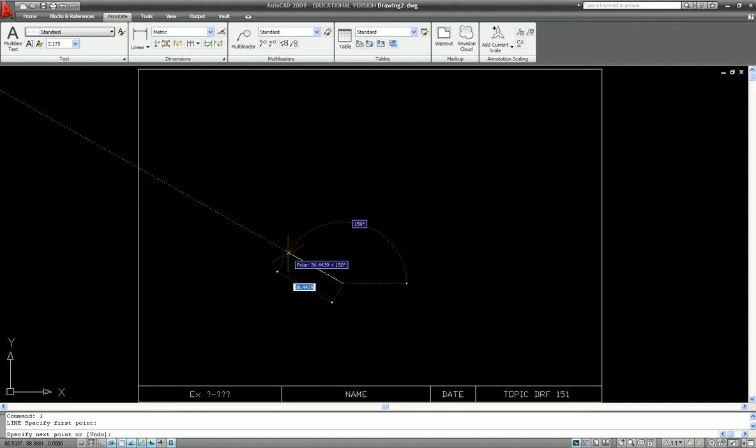Coming out along my 30 degrees, I go 60. I can then go up 30, back in 15, down 15, and now that's going to come all the way back out here to the edge. That is what represents the frontmost plane for this particular object.

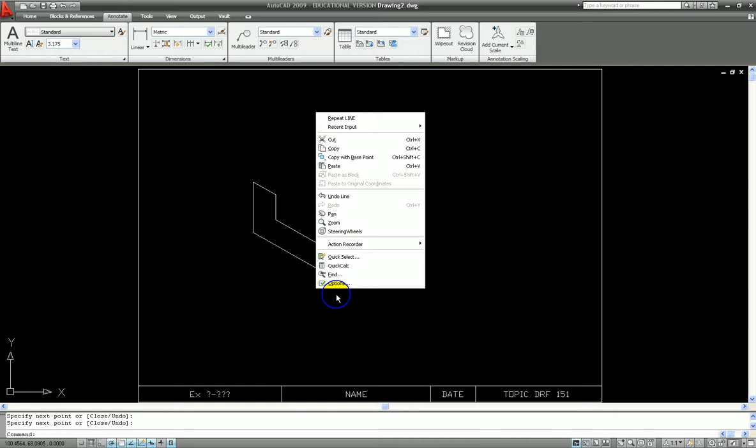Now I'm going to go ahead and repeat my line command, and I'm going to do the rightmost plane. So this goes over 30, up 25, and this is going to come back in 10, down 10, and that's going to close off. Now I can begin working on the rest of this piece.

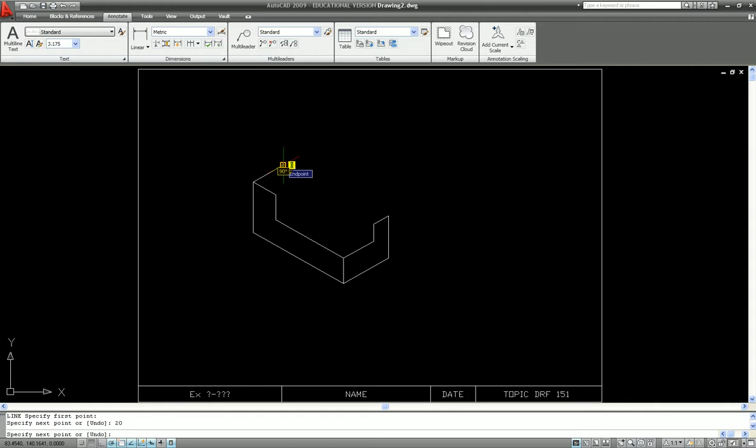And the way that I'm going to do that is I'm going to draw this top edge back, and this top edge goes back 20. After it goes back 20, it goes up 10, and then it goes back over 10. So now what I'm working on is that back profile. This comes over 40, down until it meets the projection of this at 30 degrees, and then this closes off.

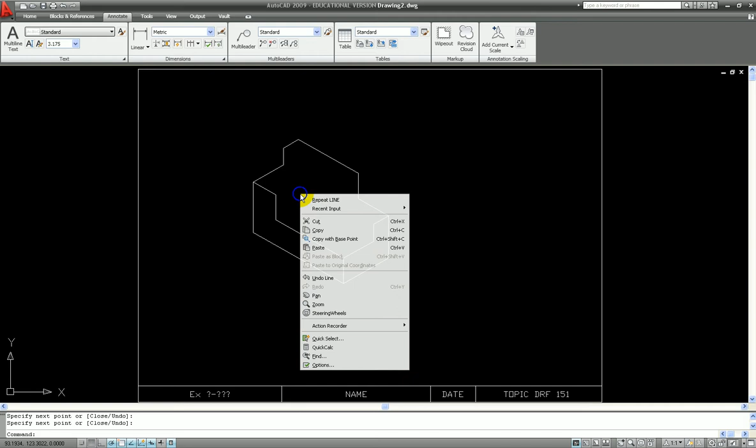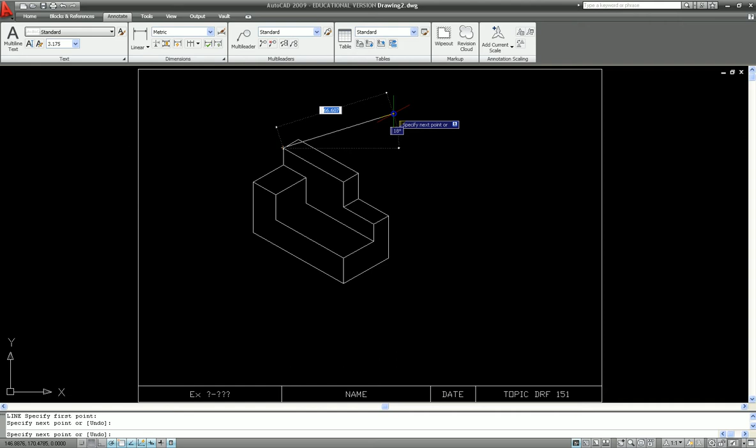Go back to my line command. We're going to make this edge solid. And what you can see starting to happen is you can see this thing starting to take some shape. So now we'll go back to my line, bring this to here, and then forward. This one here is going to come out to this point and then close that off. This will come up to here and close that off. And then we have another line segment that goes back to here to create that last segment.

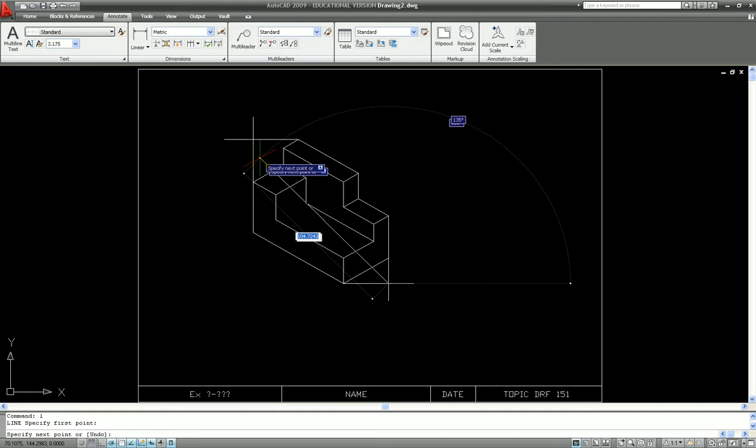Once again, we're just drawing the things that we see, and in this particular case, as far as the isometrics are concerned for this week, everything that you're going to be doing when you're done, it should look identical to the picture in the book. So now I'm going to go ahead and center this piece. And again, I'm just using the diagonal line method. It's the same method we've used since the beginning of the class. So now this thing is nice and centered.

I can delete all of this, and I need one more line that forms this edge right here. And the reason I could tell I needed one more line is because looking at the book, I saw that I didn't have all the lines that I needed. So now we're ready to begin dimensioning this, and again, it's just aligned dimensions. So first let me go to my dimension layer.

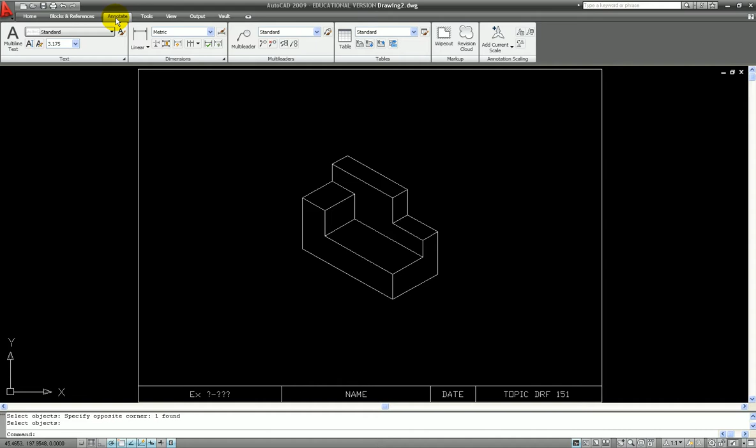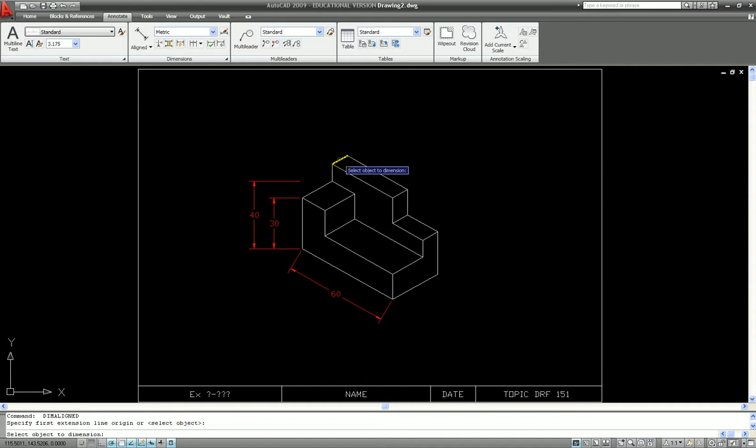And the icon for aligned dimensions is this one right here. So we're going to want to do this 60, this 30. For the 40, what you're going to notice is I'm going to project out to here to get that 40. And I'll show you why in a few minutes when we begin to oblique these.

Bring up that 40. Here I have a 15, and notice again I'm projecting to get that 15. There's my 25. There's my 30. That's all the dimensions that are required for this particular piece.

Now, when I go to dimension oblique, I'm going to do this in a slightly different manner than I did the previous one, because I know some of these dimensions are going to fall on the same obliquing angle. The 15, 25, 40, and 30 are all going to be on this angle here. The 60 and the 40 are both going to be on this obliquing angle, and the 10 and the 30 are going to be on this obliquing angle.

So rather than do it one dimension at a time, I went ahead and did multiple dimensions at the same time. Now, the reason I did this 40 like this and left a gap and the 15 with the gap, had I brought this all the way to that edge, what I would get is something really weird and obscure. So the reason we use the projection, even though we end up with this really big gap right here, we get the appropriate dimension. Then we can just go ahead and draw a line, making sure to leave a slight gap where that line is supposed to project to.

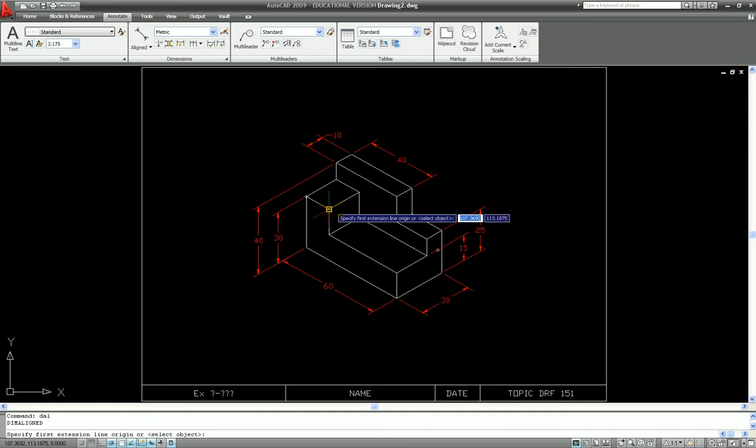Now, one thing that you do have the option to do, there are a few dimensions missing on the assignment, which we previously discussed. This is 15 right here, and this is 15 right here. So if I were to dimension those, I would go from here and then project this back to get my 15. Set that up to be oblique, and it's going to be on the same angle as the other two. And I'm going to move that just so that it looks a little bit better.

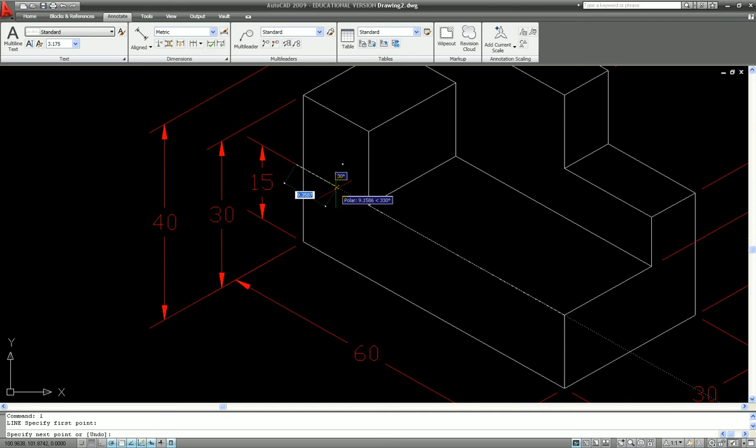Now, the way that's obliqued, it can't line up with this, so maybe I want to oblique this in a different direction. So instead of this way, we'll go back this way with it. Now, that kind of messed up the whole thing, so maybe in this case it's best to undo before you oblique. So here we'll oblique this one back at this angle. Okay, now we have a 15 that we can work with. I'll move this to that midpoint and draw a line in here to represent where that is actually coming from.

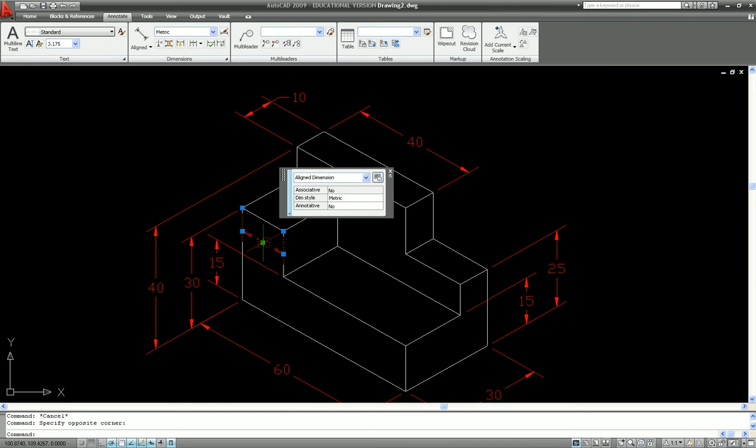And as far as this 15 right here is concerned, I'm going to do this just the real simple way. Put the 15 in, do an aligned dimension, and set that thing to be straight up and down. Now I'm going to move this down just a little bit, and I'm going to leave it right here on the object. If I bring it up off of the object, then I run the risk of running into another dimension and having to move a whole bunch of stuff around. So for this particular case, we'll go ahead and leave it like that.

And once again, develop your isometric, center it up, put all your dimensions on, and then set all your dimensions to be oblique.